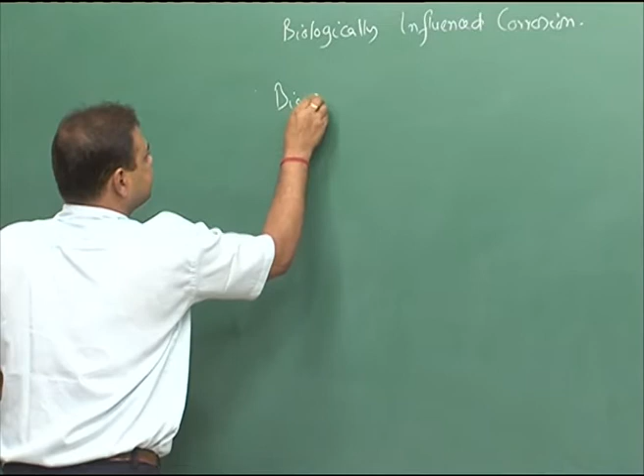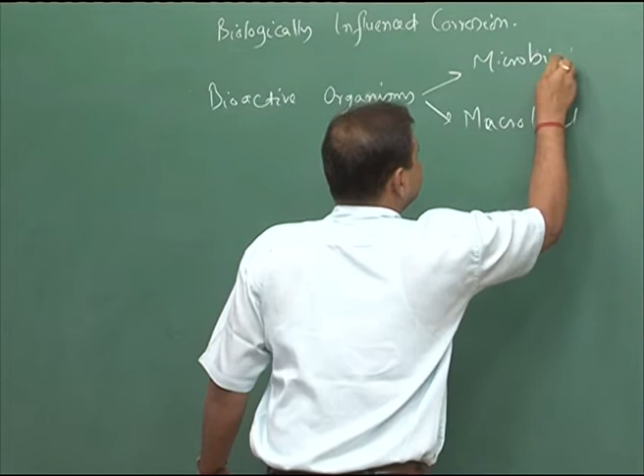This is due to bioactive organisms, and this can be either micro level or macro level. So you can term it as microorganisms, you can call it microbiological corrosion, or this macro one you can term it as macro fouling.

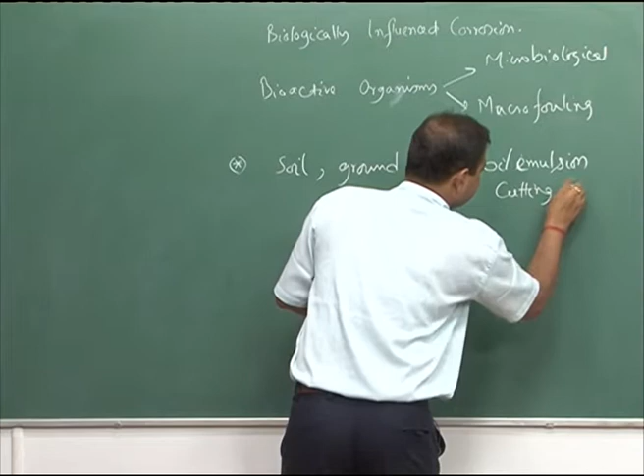So they can lead to increased corrosion rate and they can happen in different environments. Mainly you can experience this kind of corrosion in soil, groundwater, then you can also have it in oil emulsion, cutting fluid, so even you can have domestic or industrial water - there we can have this kind of corrosion attack.

And the characteristics of this kind of corrosion attack, as I have told, in some cases we can experience a very low corrosion rate, but because of this particular effect the corrosion rate increases, and that can happen due to either they directly influence the anodic or cathodic reactions, or maybe they can produce some products in that particular environment, and that product can affect the overall corrosion behavior.

So there could be one is direct influence, that means anodic or cathodic reactions. They can involve a lot of anodic and cathodic reactions and lead to more corrosion.

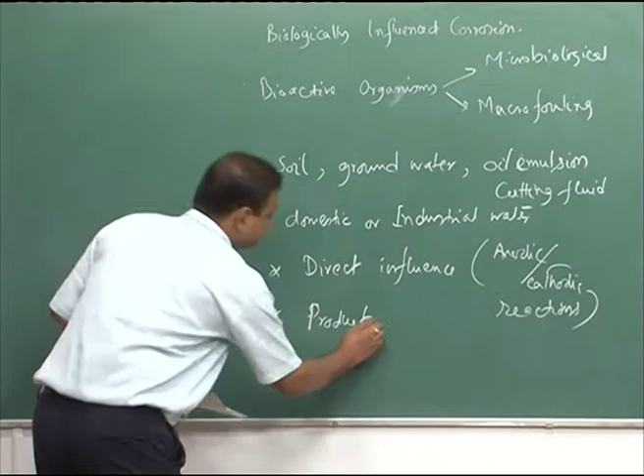Or it could be indirect influence, where the products that are formed because of those microbiological or macrofouling organisms, these bioactive organisms - you can have some products, so that product can lead to affect the surface film what is formed on the surface of the metal in that particular environment.

And sometimes these microorganisms or macrofouling, they can form on the surface of the metal and they can lead to localized corrosion, and even crevice corrosion can happen. So these are the common effects of microbiological or macrofouling related corrosion phenomena.

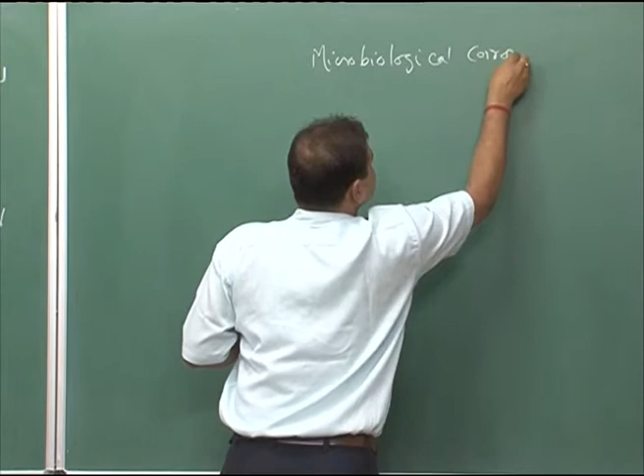Now let us see, if we come to microbiological corrosion, that can happen due to the presence of two kinds of bacteria. One is called aerobic, another one is called anaerobic, and of course, as the name suggests, these are basically bacteria - anaerobic bacteria or aerobic bacteria. As the name suggests, these can be active in the presence of air, and this can be active in absence of air.

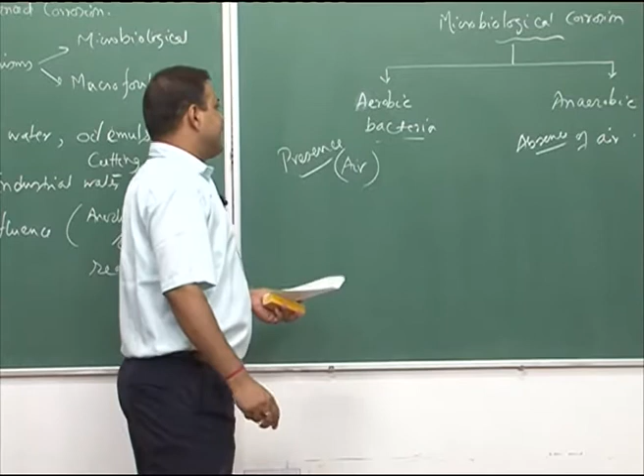This is presence and this is absence of air. So that means if we have presence of air, then this kind of bacteria can be active and that can lead to corrosion, or the vice versa - absence of air, this kind of bacteria will be active and lead to corrosion phenomena, affecting the corrosion of the particular metallic object.

Let us first talk about, let us see some examples of aerobic and anaerobic bacteria. But before that, as we have mentioned, in cases where we can have biologically influenced corrosion, we see that soil, groundwater, oil emulsion, cutting fluid, domestic and industrial water systems - there we can have this kind of corrosion.

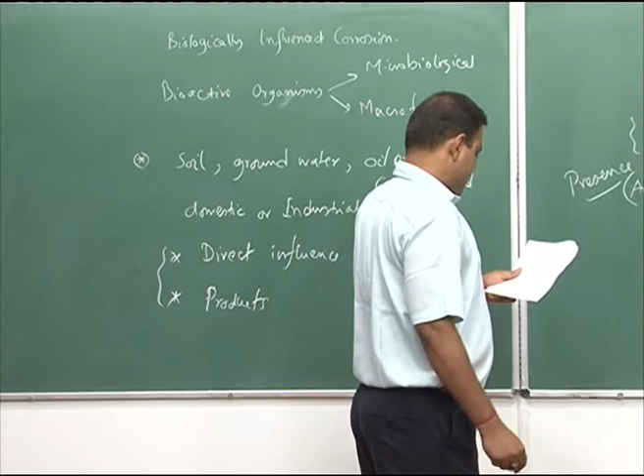And these affected areas are the areas where you can have excessive deposits or biological slimes. So there this kind of bacteria can grow and lead to more corrosion of the metallic object.

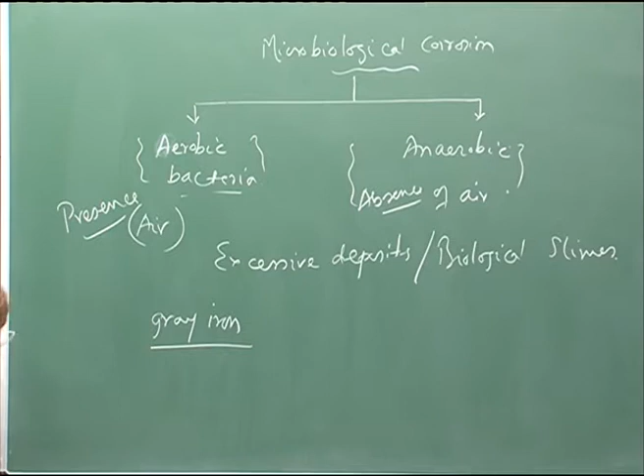For example, in case of gray iron, if we see, let us say that gray iron is exposed to a mildly corrosive medium, you can experience graphitization, or sometimes it is also called graphitic corrosion. Graphitic corrosion, where we have seen that iron leaches out and then you have on the surface a network of graphite flakes that holds the debris and it becomes very porous in nature, and in those pores you can develop bacteria growth, and that can increase the iron leaching phenomena.

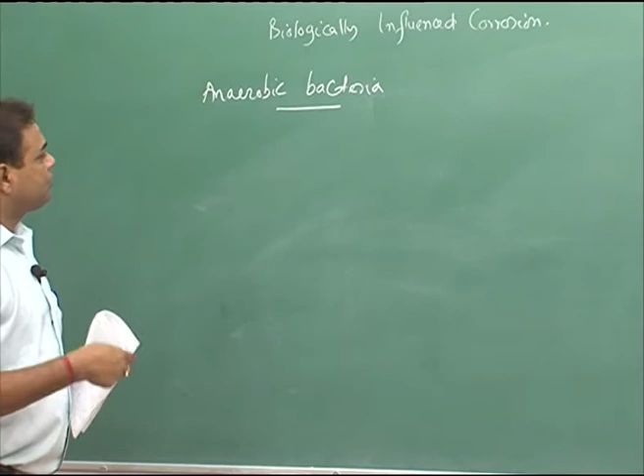Now let us first get into the anaerobic bacteria, what they can do. These anaerobic bacteria can grow in deaerated water, they can grow in deaerated soil with the presence of more amount of clay. So it can happen in waterlogged, clay rich, deaerated water. There you can have this kind of bacteria, and since there this is deaerated water, with almost less presence of air, that is what gives you the anaerobic bacteria's presence.

They can also be present in stagnant cutting fluid solution, oil emulsive solution, and also, for example, if we have aerobic bacteria, the aerobic bacteria can form some deposit. Inside the deposit you have a deaerated condition, and there you can also have anaerobic bacteria.

One particular important anaerobic bacteria is sulfate reducing bacteria, which is called desulfuricans. This is one particular bacteria, and what it does is it reduces the sulfate that is present in the solution.

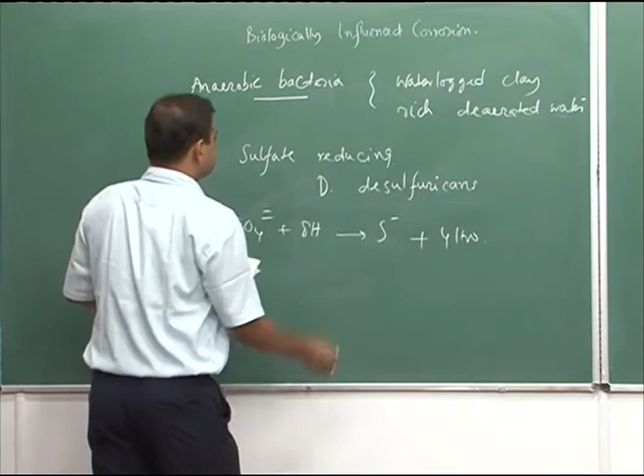So those are inorganic sulfates. If you have sulfate radicals, inorganic sulfate, that would be reduced in the presence of hydrogen, and that can form S minus 2, sulfide ion, and then 4 H2O. This happens in the presence of this particular sulfate reducing bacteria.

Now this hydrogen can be supplied either by cathodic reaction, which is H plus e giving hydrogen, or it can be supplied by organic matter present in the soil or general environment. Once you have this hydrogen, if this cathodic reaction happens, let us say 2 hydrogen ions are getting reduced, then you have 2 electrons that need to be supplied.

So these electrons can come from iron oxidation, and due to this, 2 electrons can come here, and this would lead to hydrogen reduction. So every 1 gram equivalent of hydrogen is basically equivalent to 1 equivalent of iron going into the solution.

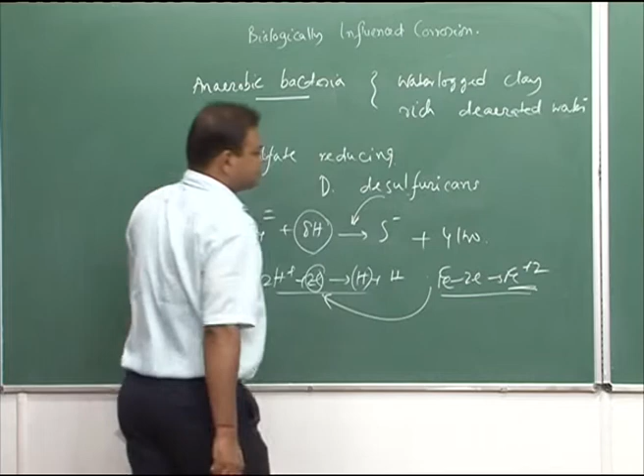So now that means you have increased iron corrosion. Now the same iron, this Fe plus 2, can react with sulfide and form Fe sulfide, ferrous sulfide. Whenever this kind of corrosion attack happens, you always see the presence of iron sulfide, which gives proof that you have this desulfuricans bacteria present, the sulfate reducing bacteria.

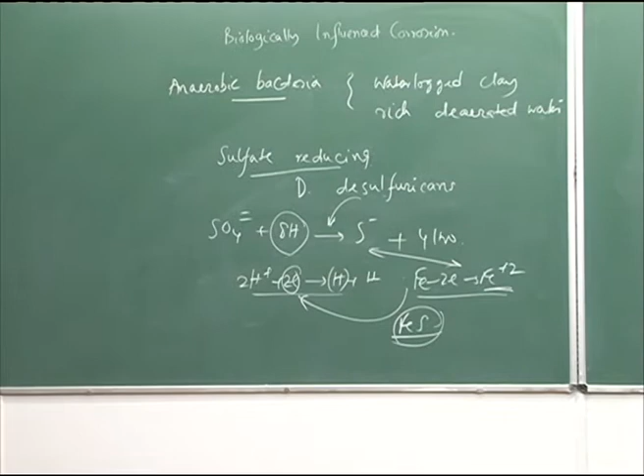Now this is the effect of one sort of anaerobic bacteria. You can also see the effect of aerobic bacteria. Let us see an example of aerobic bacteria, one particular example.

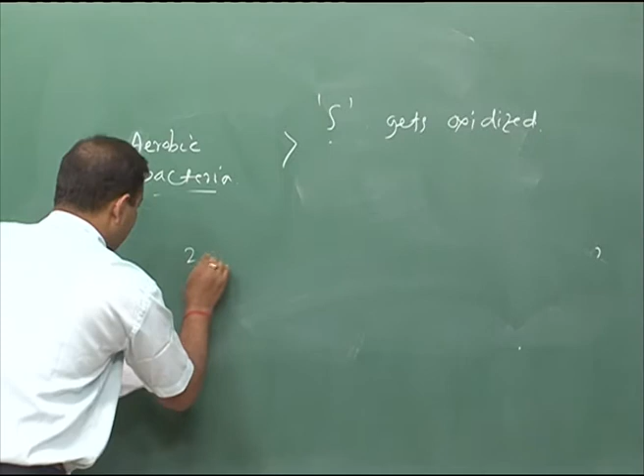It oxidizes - there sulfate is getting reduced, and here sulfur gets oxidized in the presence of aerobic bacteria. So actually aerobic bacteria oxidizes sulfur, whereas anaerobic sulfate reducing bacteria reduces the sulfate radicals. So the reaction would be 2S plus 3O2 plus 2H2O goes to 2H2SO4.

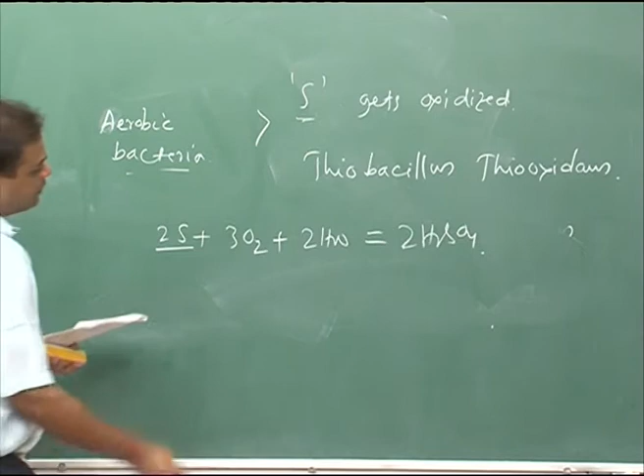So one particular example of sulfur oxidizing bacteria is Thiobacillus thiooxidans. Because of this sulfur oxidation, you have the production of H2SO4, so the pH level goes down, the solution becomes acidic, and as it becomes acidic, the corrosion rate increases.

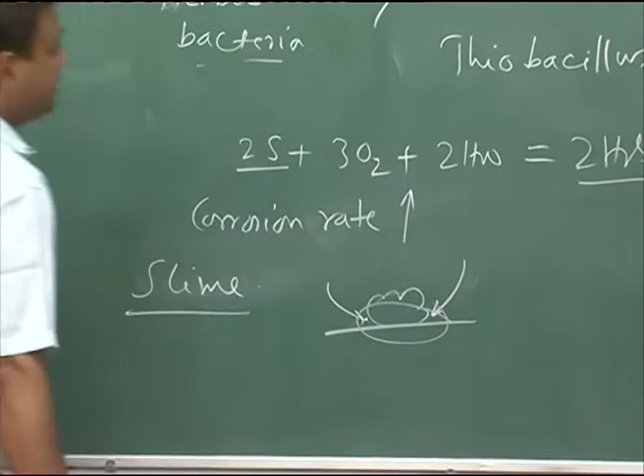Sometimes there would be production of slime, which is a polymer extract of aerobic bacteria. Let us say you have slime generation on the metal surface - this can also lead to localized corrosion attack. Also, in this slime you have less oxygen or air, and due to that you can have anaerobic bacteria growth, while the aerobic bacteria is leading to corrosion because of sulfur oxidation.

At the same time you have this slime generation, which is basically a polymer extract of this kind of bacteria, and there you have less air content, which allows growth of anaerobic bacteria, which would also lead to extra corrosion of that particular section.

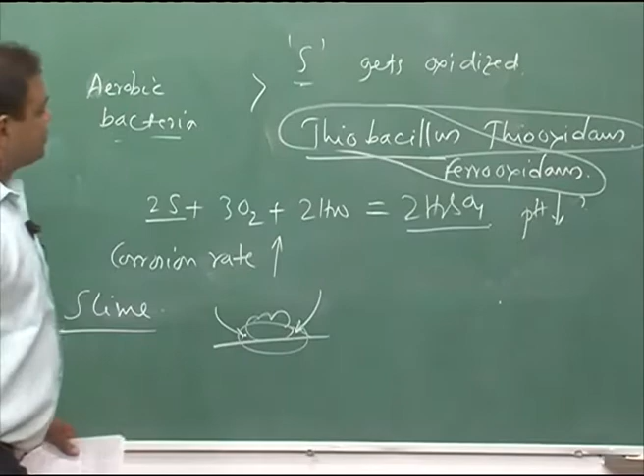Now this is one example. Another example is iron oxidizing bacteria - you can also have the presence of iron oxidizing bacteria, which is Thiobacillus ferrooxidans. So this bacteria is different from the other one. What Thiobacillus ferrooxidans does is oxidize Fe+2 to Fe+3 and enhance the corrosion rate.

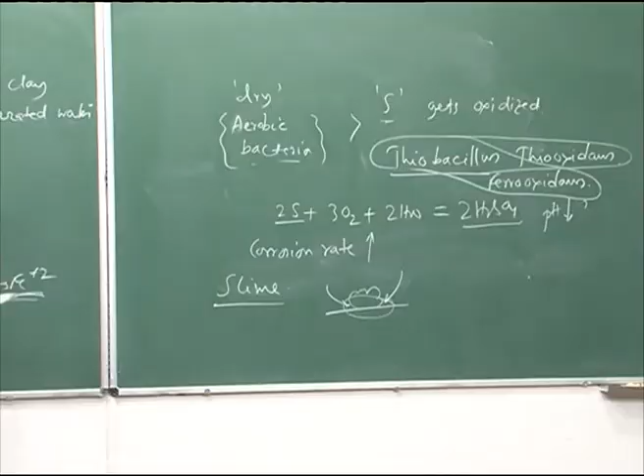So you can have corrosion due to aerobic as well as anaerobic bacteria presence. Generally, in the case of aerobic bacteria, if dry conditions prevail, you can have corrosion due to aerobic bacteria. If it is wet condition, then you can have anaerobic bacteria related corrosion - wet condition typically in the rainy season, and the dry condition in a hot summer season. So these are basically some examples of corrosion related to anaerobic and aerobic bacteria.

Now you can also have corrosion due to macrofouling. For example, in water you can always have snails, mollusks, or barnacles. They attach to the surface of the metal and form a deposit - these are the macrofoulings, and they are important.

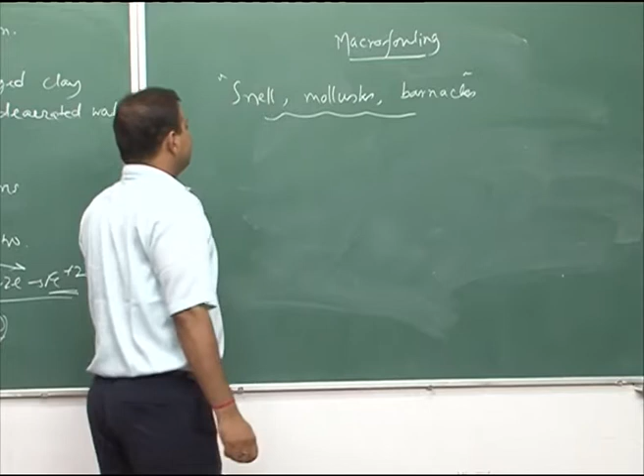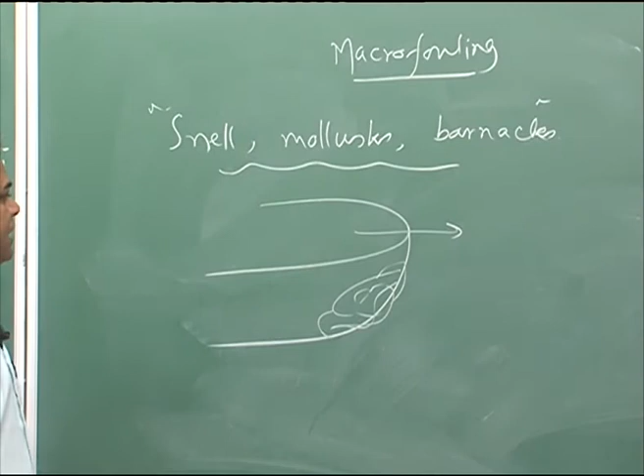Sometimes they are more important for a different reason than corrosion. For example, this macrofouling problem is experienced in the case of a ship hull when it is in sea water. If you have macrofouling deposition on the hull, it might affect corrosion, but more important is that it will increase the drag force when the ship is moving, and increase in drag force means increase in power requirement.

This shows an increase in power requirement rather than corrosion. So time to time, removal of this macrofouling is important in case of ship hulls. Macrofouling related corrosion can be experienced in metallic structures, vessels, and pipelines exposed to sea water as well as fresh water systems.

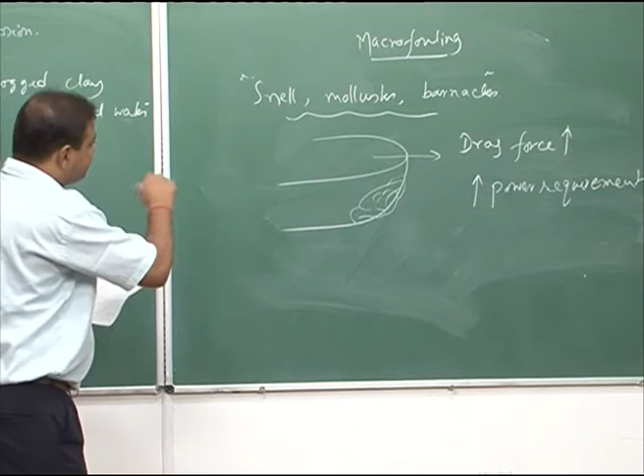Some characteristics of macrofouling: for example, under stagnant conditions, or if there is low rate of fluid flow, the macrofouling growth would be more compared to running conditions. If the relative velocity of the fluid across the metal surface is very high, the macrofouling deposition would be less.

Sometimes this macrofouling can lead to crevice attack. For example, on the surface you have a macrofouling, marked MF, and beneath this portion you get crevice generation. There you also have low oxygen content, so you can have crevice attack there.

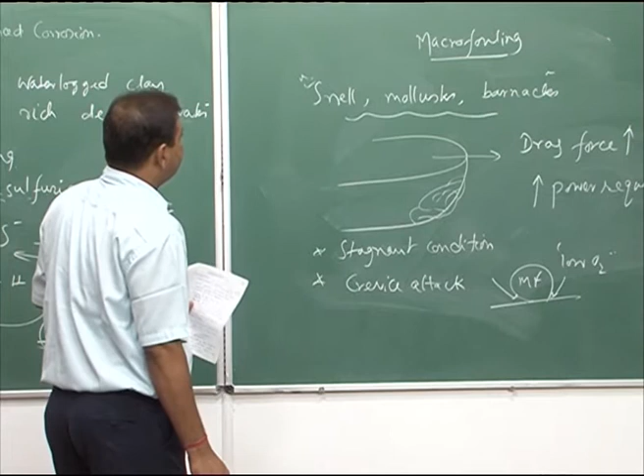Also, the metabolic byproducts of these macrofoulings are acidic. Since they are acidic, they can also increase the corrosion rate, so there is a possibility of increased corrosion rate. And since you have very low oxygen content there, of course, you can have crevice attack.

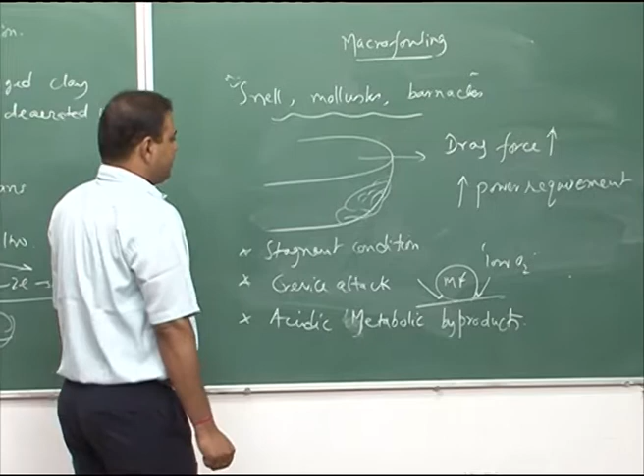At the same time, there could be a suitable condition for the growth of anaerobic bacteria. Anaerobic bacteria can grow in that condition because you have less oxygen there. So these are the common characteristics of macrofouling related corrosion.

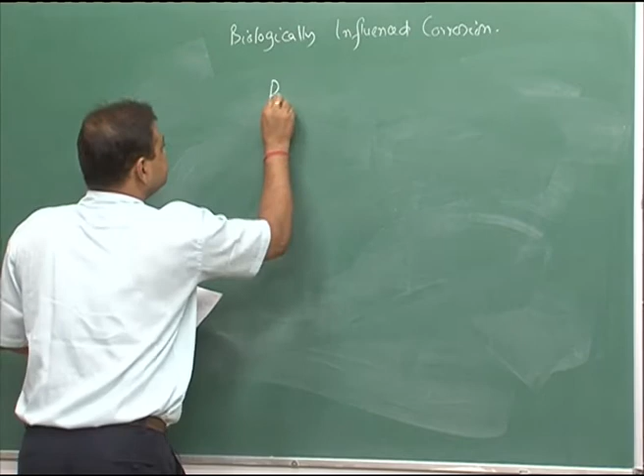Now let us check what could be the preventive mechanism in order to avoid macrofouling related corrosion or microbiological corrosion, since microbiological organisms can also lead to corrosion. So what are the preventive measures to avoid macrofouling related corrosion or microbiological corrosion? One method is—

Let us say the corrosion phenomena is due to anaerobic bacteria related corrosion. Then, of course, aeration would improve and prevent corrosion, because due to this aeration, anaerobic bacteria would die, and that would lead to decrease in corrosion rate. Or you can also have chlorination.

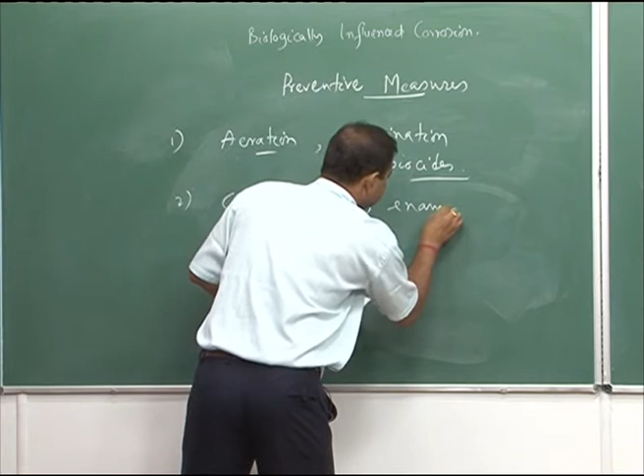Chlorination plus biocides—in combination, those two can also kill those bacteria. Then you can have coating, for example tar, or enamel, or plastic. What these do is generally provide an impervious layer on the metal surface, which would not allow the bacteria to interact with the metal surface.

Then you can also have cathodic protection, which is one way to prevent biologically influenced corrosion. Then you can substitute material—substitution of material.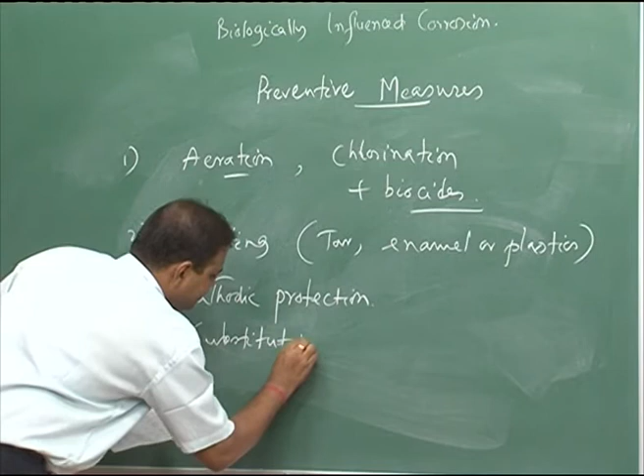For example, in a particular soil, if you have a very high corrosion rate due to this biologically influenced effect, you can go for plastic pipe, or you can also have asbestos pipe. These will be inert to those bacteria.

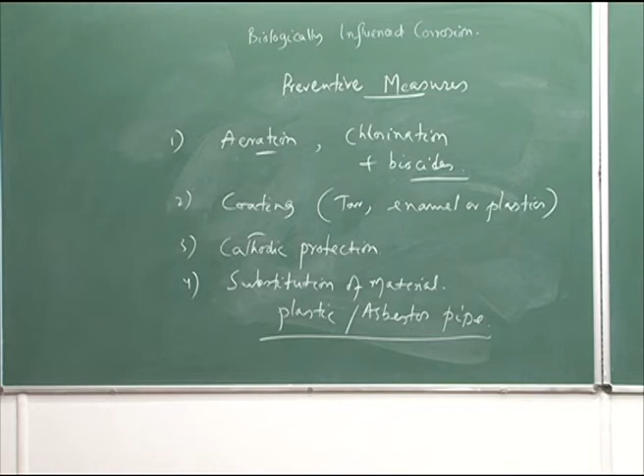Then also, for example in case of macrofouling, time to time cleaning is very important. So time to time cleaning can avoid macrofouling related effect.

Then you can also have biocides, which can interact with bacteria and kill them. So these are the common preventive measures which can control biologically influenced corrosion, and reduce the corrosion rate to a great extent.

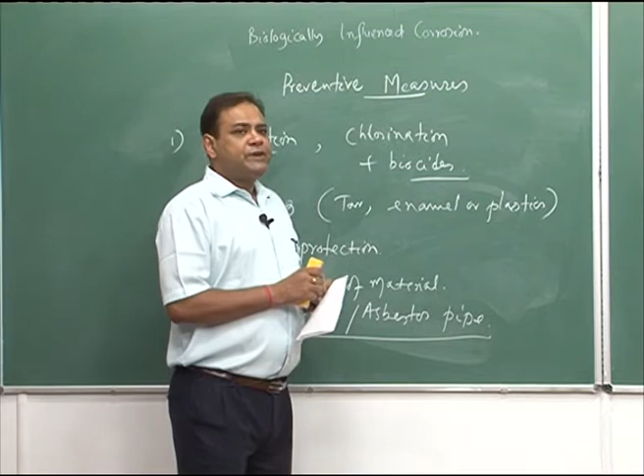So this is about biologically influenced corrosion, which has two major sections: one is microbiological corrosion, and then macrofouling. Now let me shift to another topic—this is basically the two kinds of special corrosion forms. One is biological related corrosion, and then let me also get into liquid metal related attack or liquid metal related embrittlement effect.

So the next topic would be liquid metal related failure—liquid metal attack. Liquid metal attack, if you see, can have four different manifestations.

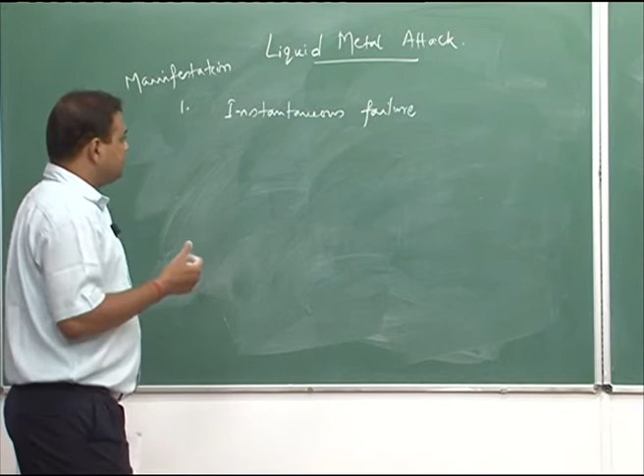One manifestation is instantaneous failure of the solid metal in contact with liquid metal, when the solid metal is under applied load or residual stress. The solid metal is under tensile stress, and that tensile stress could be applied or residual. This is one manifestation—there could be sudden failure or sudden break in the solid metal system.

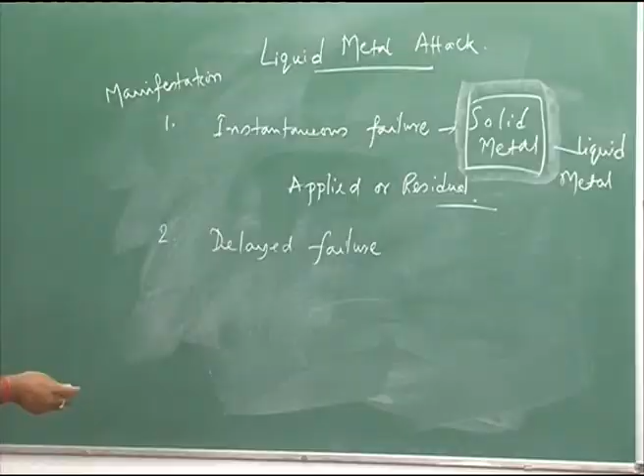Then you can also have delayed failure of the solid metal which is in contact with liquid metal, and the failure can happen below the tensile strength of the metal. So delayed failure can also happen when it is in contact with liquid metal.

Then you can have, for example, a solid metal in intimate contact with liquid metal—this is solid metal SM, and this is liquid metal LM. The solid metal has grain boundaries, and there could be a possibility of liquid metal penetrating through the grain boundary regions. This penetration can happen without the presence of stress. So this is one sort of manifestation of liquid metal attack.

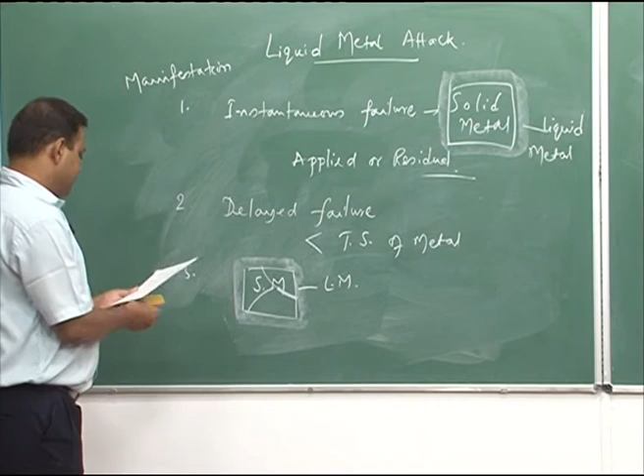And then lastly, you can also have high temperature corrosion.

Due to liquid metal, these are four manifestations, but we would concentrate our discussion on this fracture condition and a little bit of the corrosion effect, which is basically a delayed effect, which can be either through the grain boundary where liquid metal can penetrate, or high temperature corrosion in the absence of stress.

But if you see these two conditions, they are more or less almost similar to stress corrosion cracking, where you have a solution, and due to the solution effect on the solid metal, that leads to stress affected failure, when the stress as well as corrosion both are occurring simultaneously. But here the solution is nothing but the liquid metal, not an aqueous medium.

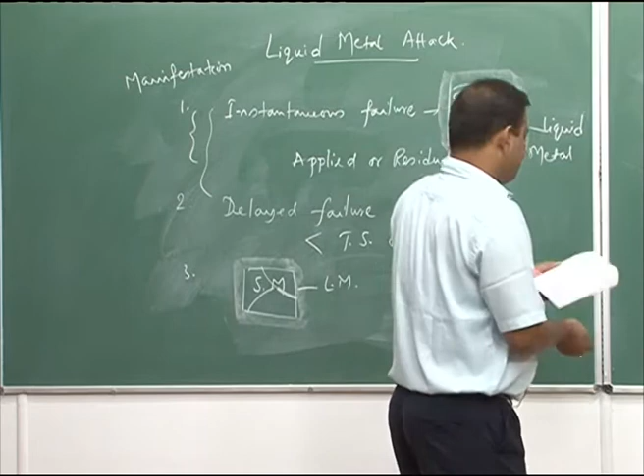Now, if we see the liquid metal corrosion, actually it is basically catastrophic or delayed failure of solid metal when it is in contact with liquid metal, and there could be some effect or result of this attack.

One could be loss of ductility, then you can have reduction in fracture stress, or strain, or it can be both.

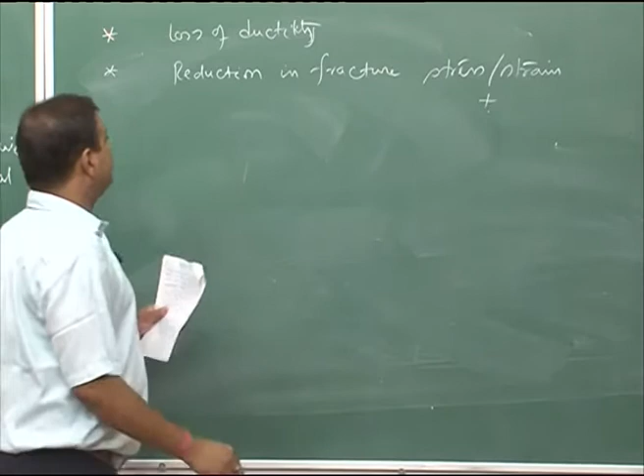Then of course, there is basically a ductile to brittle fracture, and generally this brittle fracture could be intergranular, or it can be transgranular, cleavage kind of fracture.

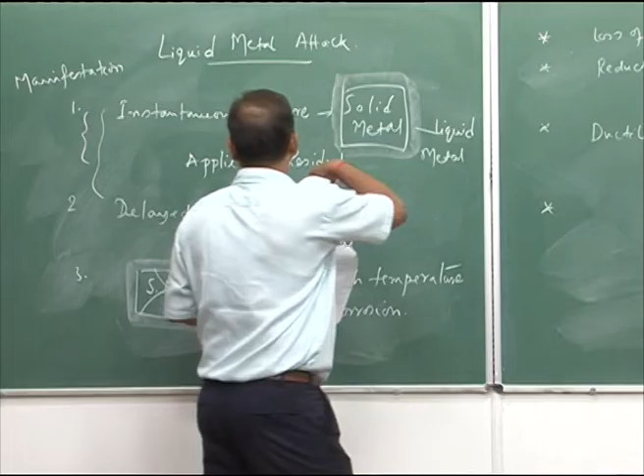Then you can also experience, as I have mentioned already, that it could be instantaneous or delayed failure, and fracture morphology. Coming to fracture morphology, as mentioned, ductile to brittle fracture could be intergranular or transgranular cleavage.

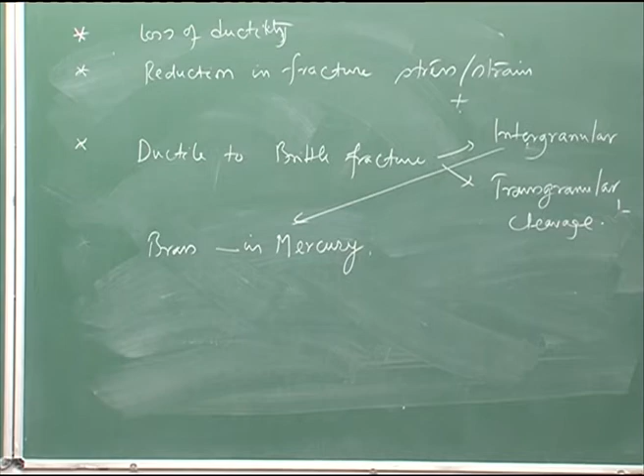For example, one example of intergranular fracture is experienced in case of brass when it is exposed to mercury. You experience generally intergranular corrosion, and an intergranular fracture surface is experienced.

Now, this liquid metal attack, mainly the failure or fracture part, is specific to some environment, specific to environment.

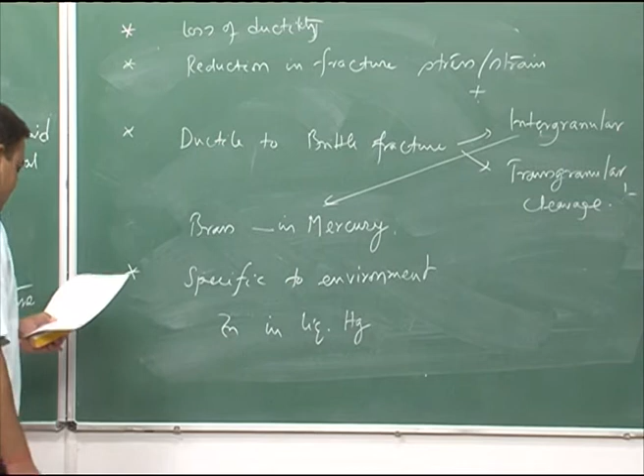It means that you can have an embrittlement effect, or the fracture effect, rapid or instantaneous fracture effect, of zinc in liquid Hg, which is nothing but liquid mercury. You can experience that instantaneous failure, which is nothing but the embrittlement effect due to the presence of liquid metal.

It is also called liquid metal embrittlement, and in short it is called LME. So LME can be experienced in case of zinc when it is in contact with liquid mercury, but it cannot happen in case of cadmium. The same thing, you cannot experience any LME.

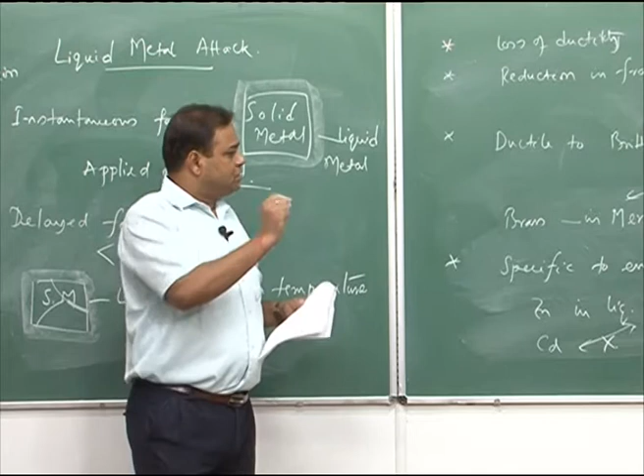Now, another example is liquid gallium embrittles aluminum, but it cannot embrittle magnesium. So that means there is some specific nature of this LME effect, or the liquid metal embrittlement effect, a specific nature of environment that can guide or tell whether a particular solid metal can have liquid metal embrittlement or not.

So, we can also experience the severity of corrosion attack or liquid metal embrittlement of a particular environment, the severity of embrittlement.

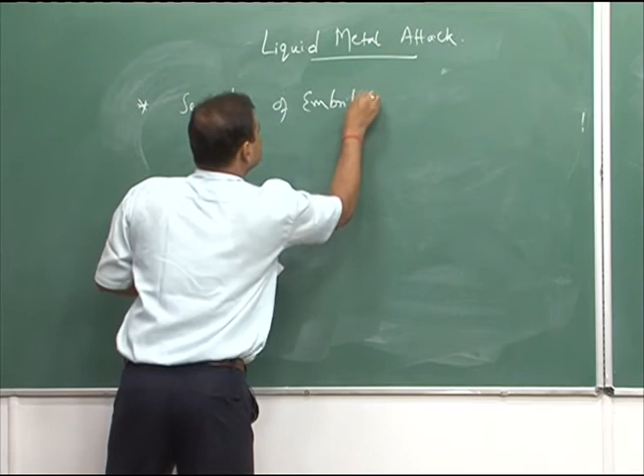This is another part which is basically: sometimes you can experience a very high rate or high degree of liquid metal embrittlement, but if you add some element in the liquid, then the embrittlement effect would go down. So we see that the severity of embrittlement is another important issue, and here one particular example is polycrystalline aluminum.

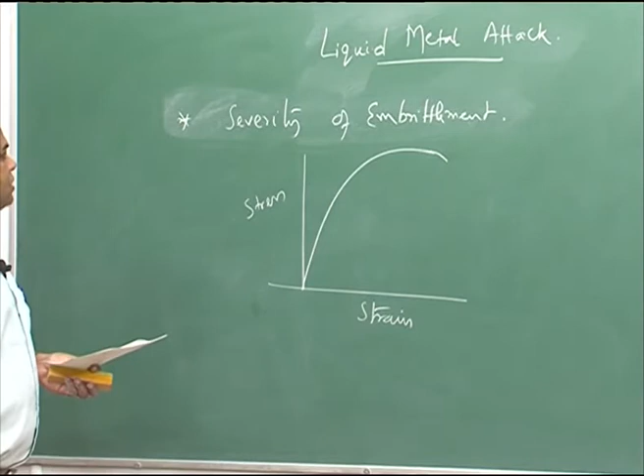If the embrittlement effect of liquid mercury is studied in case of polycrystalline aluminum, let us say this is stress strain, engineering stress strain data, where if it is normal solid metal without the presence of liquid metal, you have this sort of stress strain behavior.

Now, if we see the embrittlement effect of liquid mercury in case of polycrystalline aluminum, let us say if we add only mercury, there would be a break which is happening prior to its normal fracture stress.

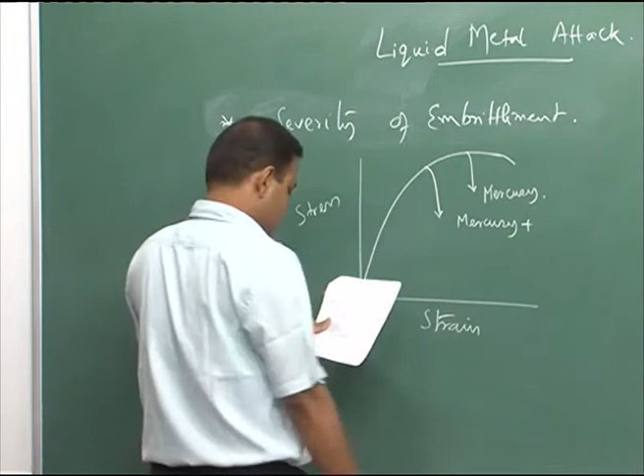Now, if it is alloyed with the mercury liquid metal, if we have mercury plus 1.3% tin, then your embrittlement effect becomes more severe.

And then if we have mercury plus 3% zinc, the severity effect is maximum. That means where mercury as well as zinc are present in the liquid metal, then your embrittlement effect in case of aluminum would be maximum.

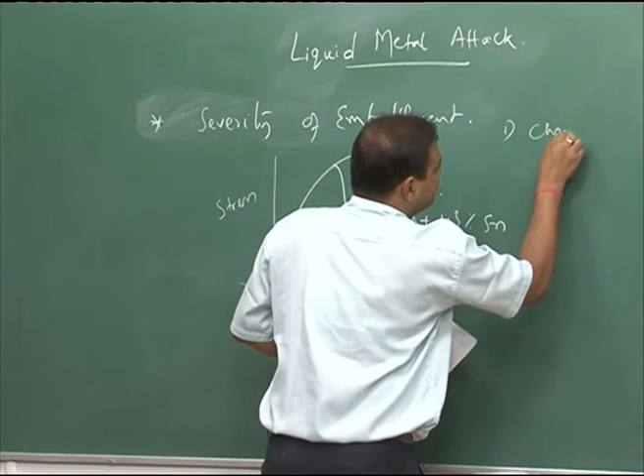This is the severity of embrittlement, and that is decided by, one is chemical nature of the liquid metal, as well as of course, the solid metal.

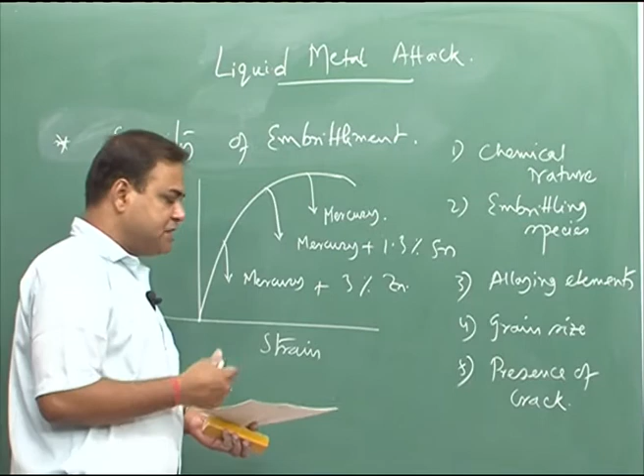Then you can have the embrittling species, then you can also have the effect of alloying elements, then grain size, then of course presence of crack in the material, and the nature of the crack, that would decide the severity of embrittlement in case of liquid metal embrittlement effect. Then you can also have the effect on the stress strain curve.

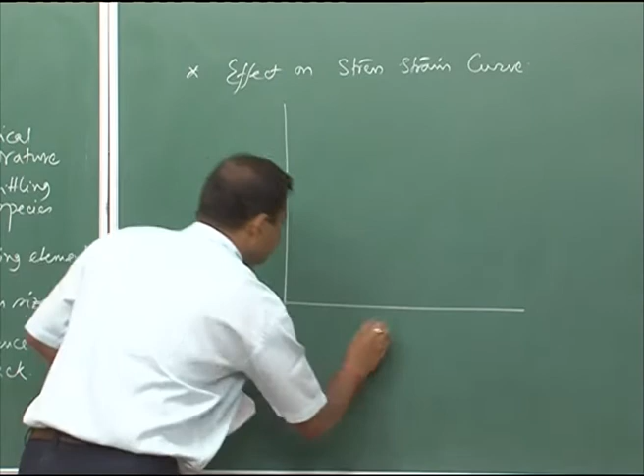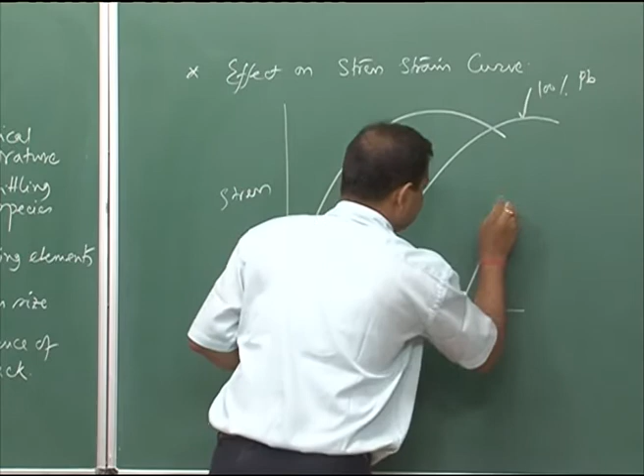So, for example, one such example is in case of copper. If we want to see the embrittlement effect in the presence of bismuth, here is stress, here is strain. If it is uncoated, that means without the presence of any liquid metal, you have characteristics like this. And if it is 100% lead, you can have the character like this. So in case of 100% lead versus uncoated, you do not have much change, only a little decrease in the total fracture strain, but your yield point as well as ultimate tensile strength remain unchanged.

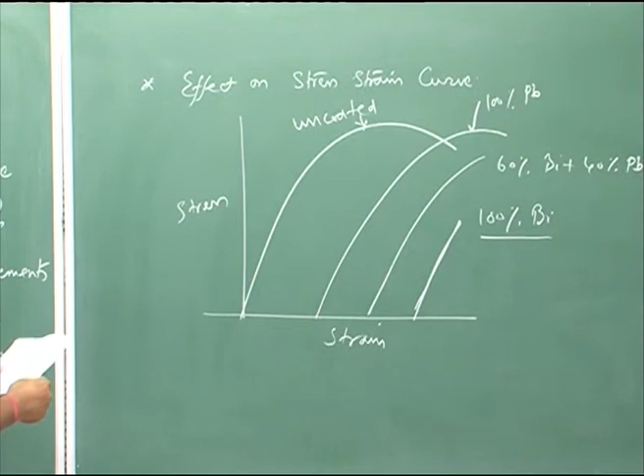But once we have 100% bismuth, you have a very aggravated embrittlement effect. And if you alloy this 100% bismuth with lead, let's say 40% lead and 60% bismuth, you can have little improvement and there will be delayed embrittlement. So this is basically the effect on the stress strain curve. There could be reduction in fracture stress and total fracture strain, and this is one particular example in case of polycrystalline copper.

And then, this is basically the common characteristics of liquid metal attack or liquid metal embrittlement effect.

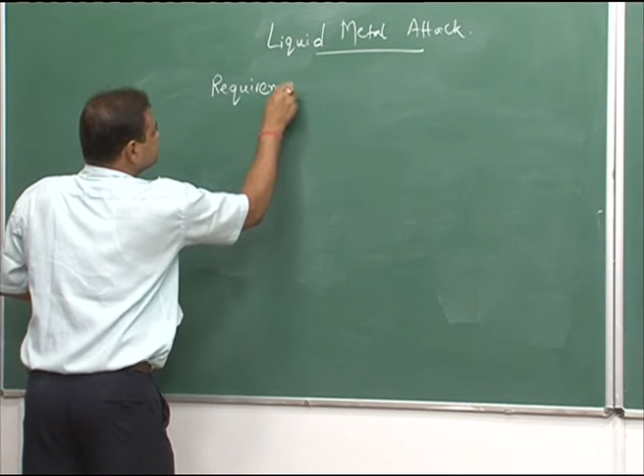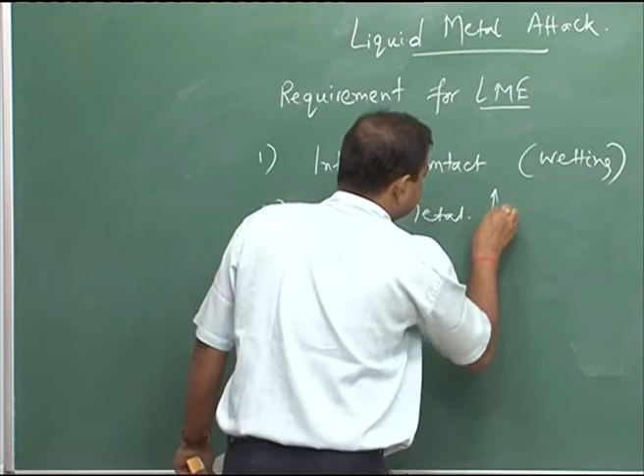Now, if we would like to see what could be the requirements for liquid metal embrittlement: the requirements for liquid metal embrittlement - first, there should be intimate contact or proper wetting of the solid metal by the liquid metal. That is the first requirement. Then the solid metal must be stressed, and sufficiently stressed to produce plastic deformation in the solid metal.

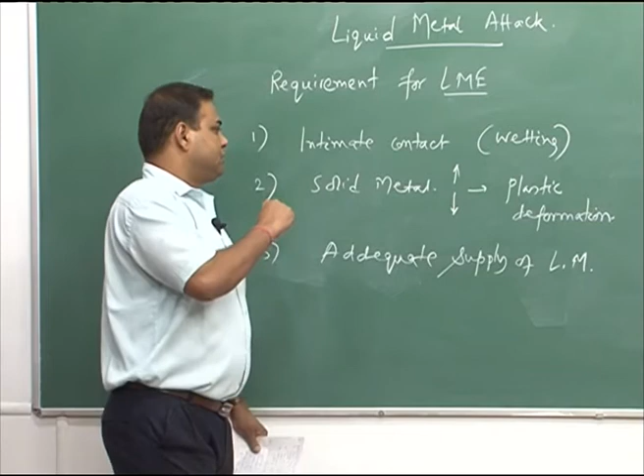This is the requirement for LME, and third, there should be adequate supply of liquid metal. So these are three conditions or requirements for liquid metal embrittlement. If we do not have intimate contact, the liquid metal embrittlement effect would not be experienced. And if the solid metal is not properly stressed, if there is no plastic deformation, liquid metal corrosion can happen, but the embrittlement effect may not be observed. And there should be adequate supply of liquid metal.

And lastly, there are several factors which can influence liquid metal embrittlement. One is, of course, the grain size effect. Generally we see that if it is a coarse grain structure, there we have more embrittlement - coarse grain material experiences embrittlement more than fine grain material.

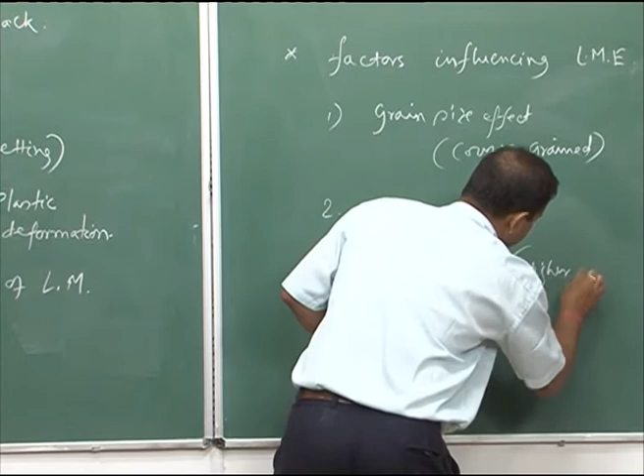Then you can have a temperature effect, and generally the temperature should be more than the melting point of the liquid metal. Then you have the strain rate effect - higher the strain rate, more would be the embrittlement effect. And then, of course, the effect of alloying, which is also an important factor in case of liquid metal embrittlement.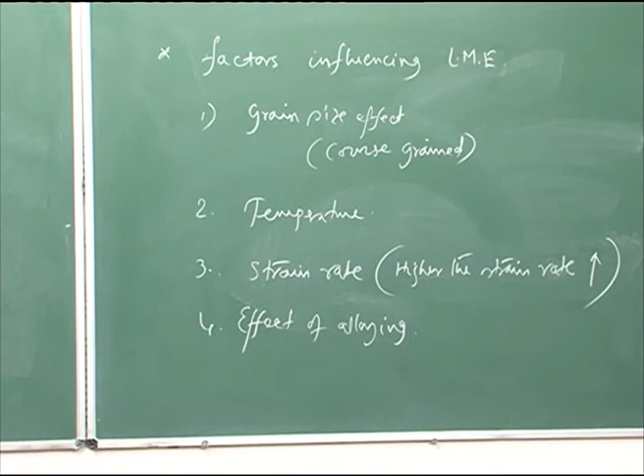Now, if we come to see what are the mechanisms by which liquid metal embrittlement can happen in a particular solid metal, there are three different routes or mechanisms through which liquid metal embrittlement can happen in a particular material. Generally, one would be the reduction in surface energy.

The presence of liquid metal can lead to reduced surface energy at the crack tip zone. If we reduce the surface energy, then you can have a lower fracture stress at which liquid metal corrosion, or liquid metal embrittlement, can happen.

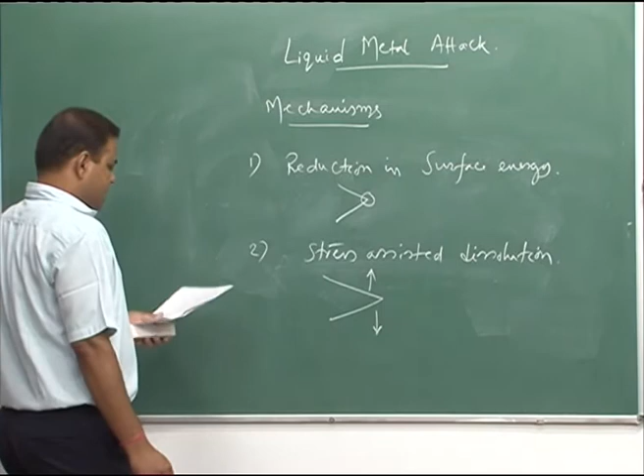Then the second case is the stress assisted dissolution model. Here you have the crack tip, and this is under stress, and because of that there could be localized dissolution, which leads to increased crack growth - the crack growth would be possible due to the localized dissolution, and the stress is always there to keep the crack open. This is stress assisted dissolution.

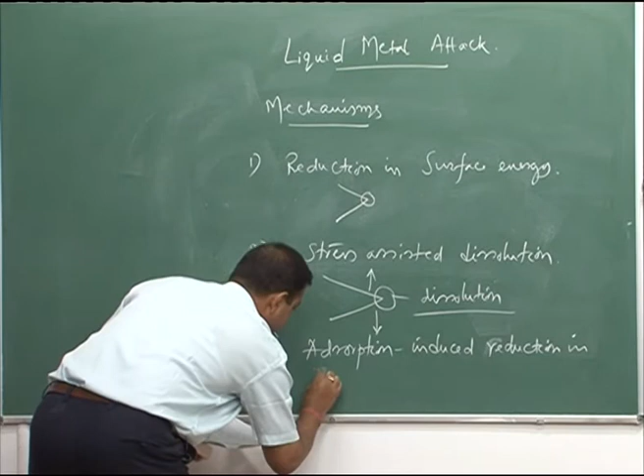Then you can also have another mechanism which is adsorption induced reduction in tensile strength, tensile cohesion, or shear strength.

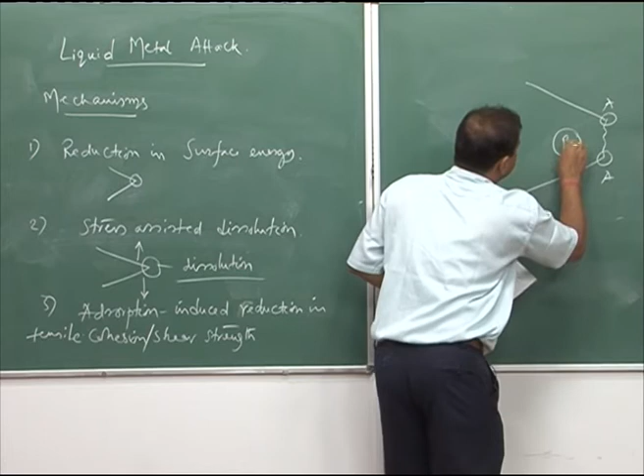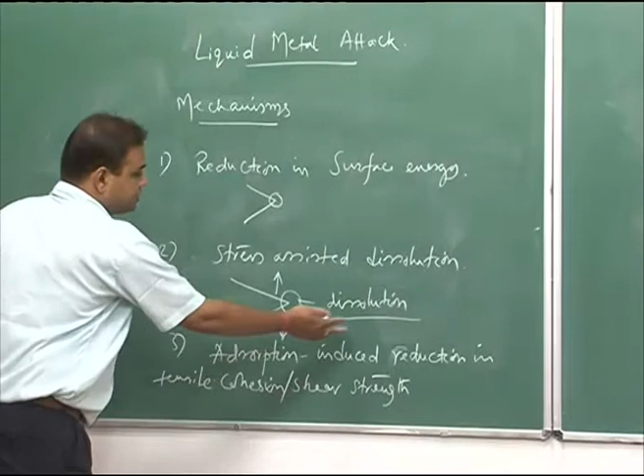What it says, for example, in this last case: let us say you have a crack like this, and here you have the material - this is my crack, this is the solid metal atom, here you have the bonding, and here you have the embrittling atom which is B. Due to the surface adsorption, B can go and sit here. Let us say here you have the shear stress tau, active on the shear plane, and this is my tensile stress axis. So once B gets in there, it weakens this atomic bond strength, and because of the weakening effect, the shear strength or tensile cohesion strength both go down, and the crack can propagate through this. So this is the third mechanism: adsorption induced reduction in tensile cohesion or shear strength.

Now, these are the three mechanisms. Now let us get into the preventive measures. What could be the preventive measures?

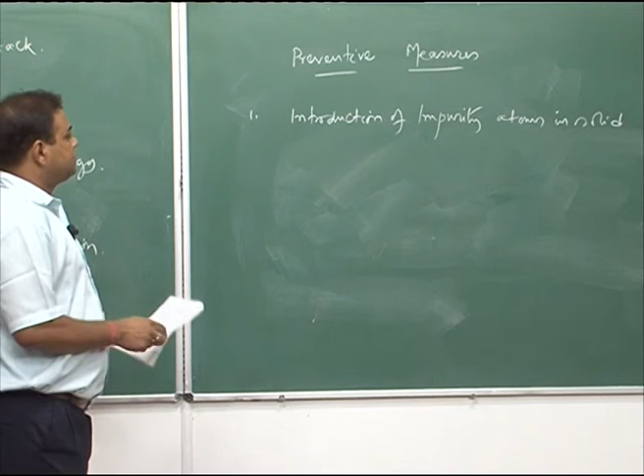Preventive measures: one is you can have impurity atoms in the solid. So introduction of impurity atoms in the solid - that impurity atom can share its electron with the solid-liquid atom, and thus the solid metal would be protected from the embrittlement effect.

Then you can also introduce solute addition - solid addition in the liquid metal. One particular example is addition of lead in liquid bismuth. Bismuth generally induces the embrittlement effect in aluminum. So in case of, sorry, this is in case of copper - solid copper. If we introduce lead in liquid bismuth, we can have a less severe embrittlement effect.

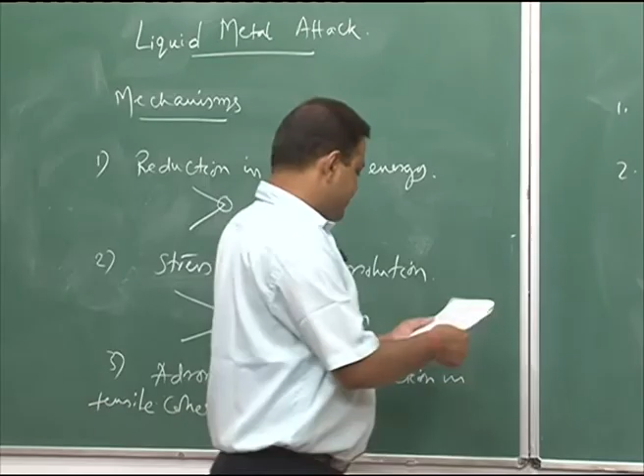Then also we can have, let us say, a solid - this is my solid metal, and this is my liquid metal. If we can produce some sort of barrier around this metal surface, which can be either ceramic or metallic, that would give you protection against liquid metal embrittlement.

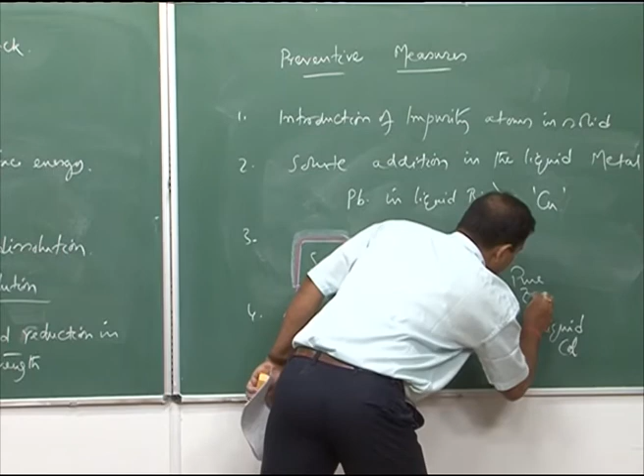Then fourth is cladding. Generally zircaloy that is cladded with pure zirconium - that pure zirconium cladding reduces the zircaloy embrittlement effect in the presence of liquid cadmium. This liquid cadmium effect is experienced in case of atomic reactors where zircaloy is used and the liquid cadmium related embrittlement effect is experienced. So if we have a pure zirconium cladding, then we can protect the material from liquid metal embrittlement.

And of course, if you can reduce applied or residual stress - so these are some preventive measures. Now, all together, this is basically whatever discussions we have done on liquid metal embrittlement as well as overall liquid metal attack.

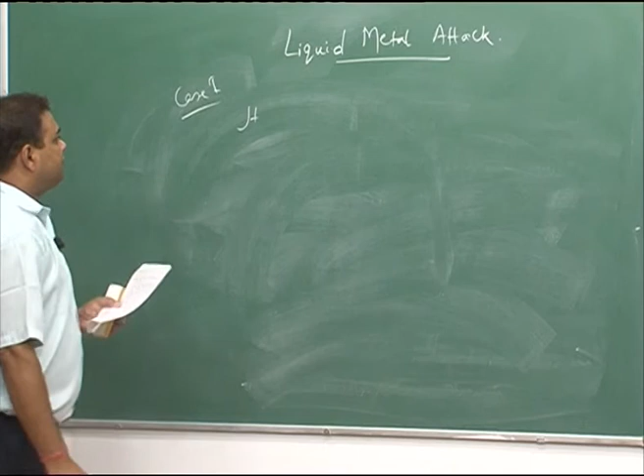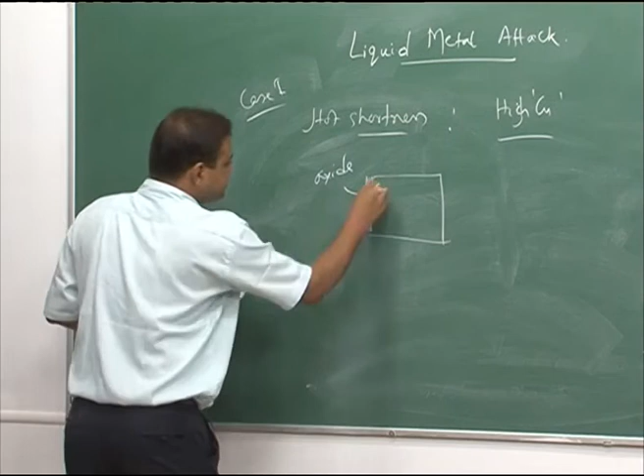Now there are many examples of this liquid metal embrittlement effect. A few examples, the case studies, let me put forward. Case 1: sometimes in case of copper containing steel, when that steel is hot rolled, we experience hot shortness. Hot shortness in case of steel is related to low melting sulphide component formation along the grain boundary. So in this case, if we have high copper in the steel - so you have this steel, and on the surface you can have oxide, and just below the surface you can have high copper compound formation, a low melting compound formation.

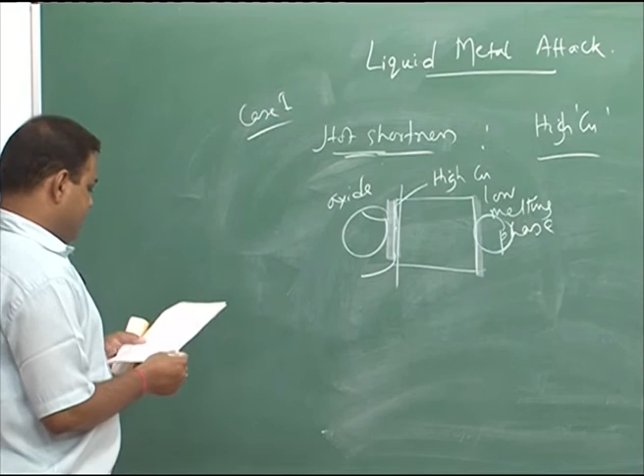Low melting phase. So now if we roll it like this, now you are rolling it, this thing also can happen on this side. During rolling, this one would form a liquid because that is a low melting phase, and that can lead to hot shortness. This is one example of liquid metal attack, and that liquid metal is nothing but this high copper low melting phase which is getting melted, and that phase can penetrate along the grain boundaries - let us say these are my grain boundaries.

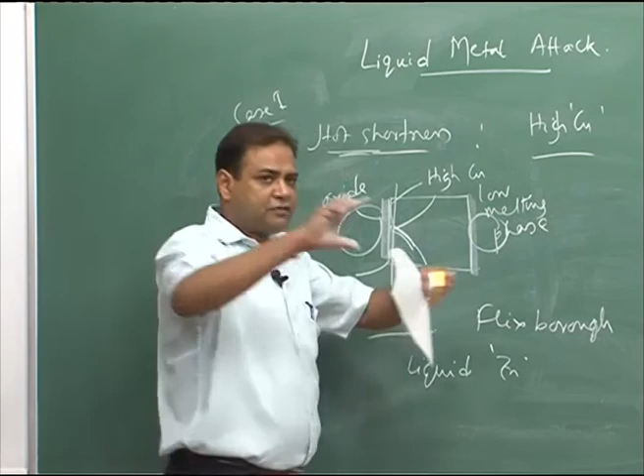Now another case - this is basically a practical example, another practical example that happened in 1974 in one of the factories in Flixborough. There they experienced this sort of liquid metal attack, which is due to liquid zinc and an unsupported pipeline in this factory, which is basically a cyclohexane producing factory. On that unsupported pipeline, the liquid zinc related embrittlement effect was experienced, and the entire pipeline broke into pieces. There was a fatal accident, and around 28 people died.

And there, this liquid zinc - the source of that liquid zinc was that in the factory they used to use galvanized staircases, and due to the heat, zinc droplets fell from the galvanized staircase onto that pipeline, and that led to liquid metal embrittlement of that pipeline. So this is another example, meaning liquid metal embrittlement can be fatal in some cases. So this is about liquid metal related attack, and more specifically the effect of embrittlement due to the presence of liquid metal.